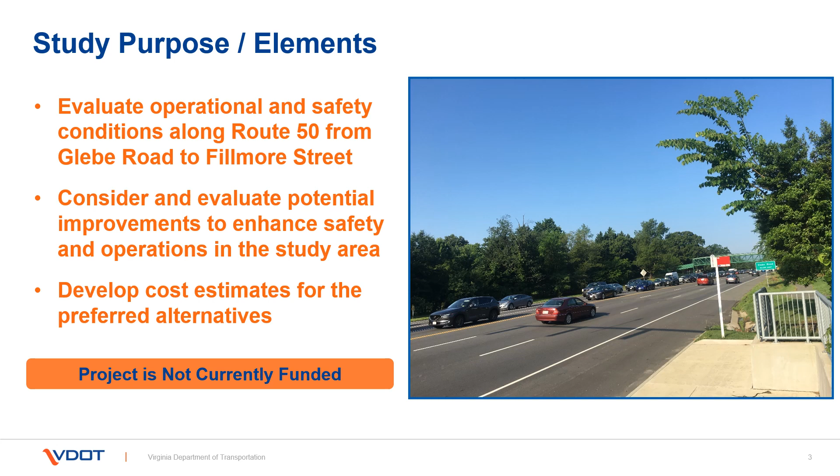The purpose of the study is to evaluate safety and operational conditions along Route 50 within the study area between Glebe Road and Fillmore Street, and to evaluate potential improvements to enhance safety and operations. Cost estimates will also be prepared for the alternatives under consideration to determine the amount of funding needed to implement the improvements. We want to emphasize that improvements identified as part of the study have not yet been funded, and there's no timeline for construction.

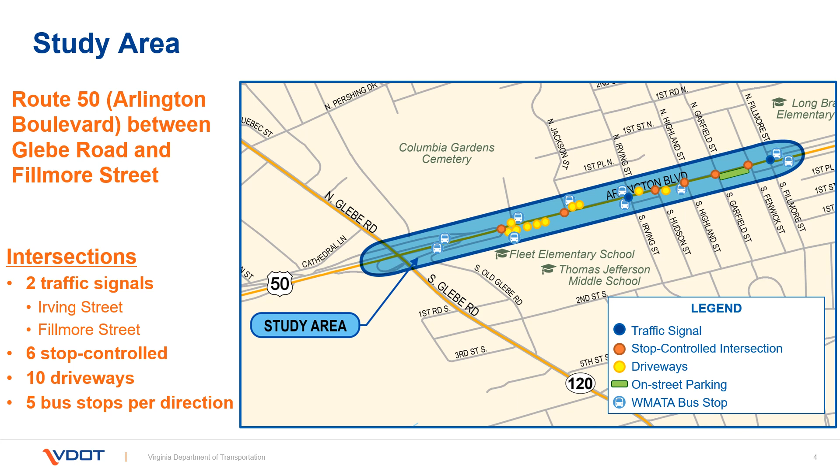The study area consists of Route 50 between Glebe Road and Fillmore Street. This section of Route 50 includes the two signalized intersections at Irving Street and Fillmore Street, which were recently improved with new traffic signal equipment and upgraded pedestrian and bicycle amenities. There are also 6 unsignalized intersections and 10 driveways.

The Route 50 study area is a little under a mile long, and about 62,000 vehicles travel through this area each day. Route 50 has a 45-mile-per-hour speed limit and has 6 travel lanes with 3 per direction, with no median and no turn lanes at most intersections. On-street parking is permitted along Route 50 between Garfield Street and Fenwick Street, and there are segments of frontage roads throughout the corridor to provide access to residential driveways and connect side streets.

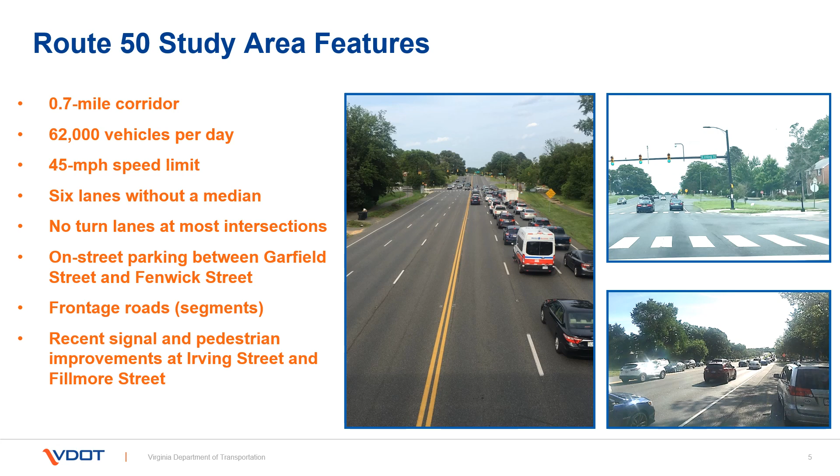The photo in the middle of the page depicts the 6 lanes without a median or left turn lanes approaching the Irving Street intersection. This illustrates the operational issues of not providing left turn lanes, especially at signalized intersections like Irving Street, and how through vehicles are avoiding this travel lane, reducing the efficiency of the third lane on Route 50. This also creates a major safety issue and increases the potential for rear-end and left turn related crashes.

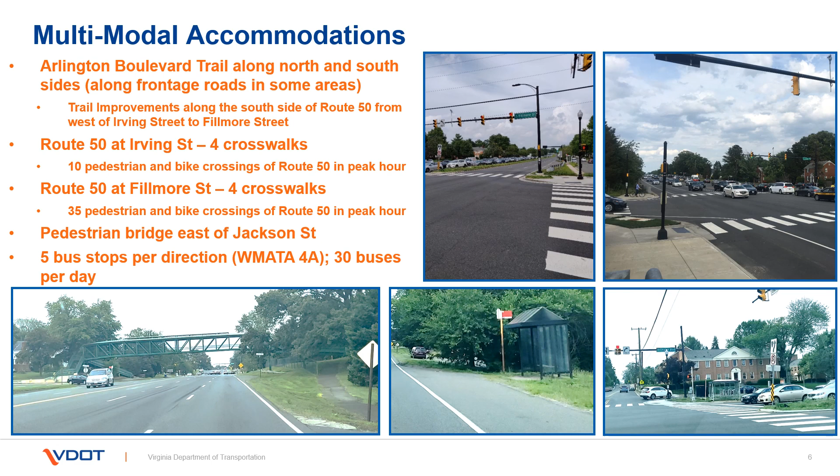The study area also contains several accommodations for pedestrians and bicycles. The Arlington Boulevard Trail runs along both sides of Route 50. The Irving Street and Fillmore Street signalized intersections each have signalized crosswalks on all 4 legs of the intersection, with the highest number of pedestrians crossing Route 50 on the east side of Fillmore Street. Pedestrians also have the option of crossing Route 50 on the pedestrian bridge located east of Jackson Street.

To assess safety conditions along the corridor, the study team reviewed crash data for a 5-year period. 247 crashes occurred within the study area, including 61 that resulted in injuries. 7 involved pedestrians or bicyclists, 5 of which occurred near Fillmore Street. Crashes were evaluated to identify appropriate improvement alternatives. Rear-end crashes were the most common type, followed by angle crashes, which can be attributed to a lack of access control at intersections. The crashes are more concentrated at intersections.

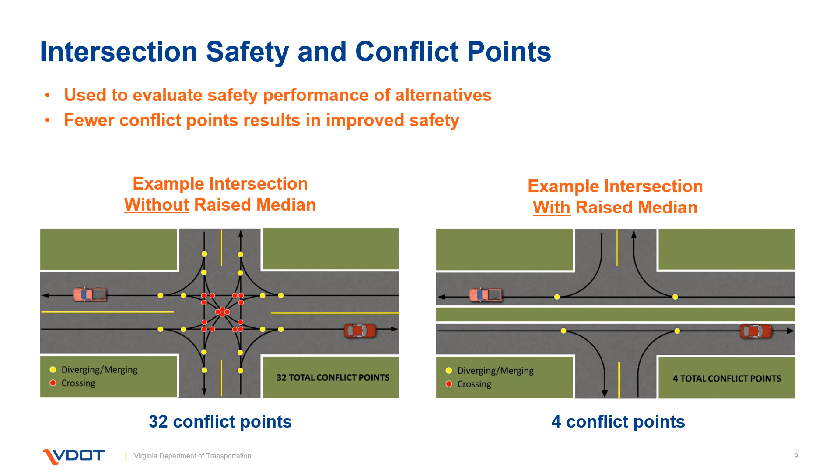During the data collection efforts, videos were recorded at the study intersections. This video was taken at Irving Street during the AM peak hour with the camera looking towards the southeast. Because vehicles turning left from Route 50 to Irving Street do not have a left turn lane or green arrow, they sit in the middle of the intersection waiting for a gap in traffic.

At the same time, vehicles who want to continue through on Route 50 become stuck behind the left turning vehicle and oftentimes switch lanes to go around. As you can see, the heavy eastbound Route 50 traffic during the AM peak hour causes long queues through the Irving Street intersection, making it even more difficult for vehicles wanting to make a westbound left turn onto Irving Street.

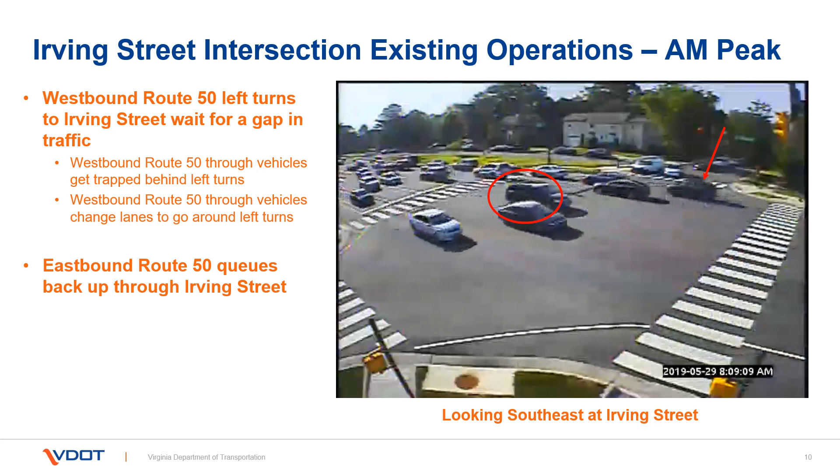This next video was taken at the Fillmore Street intersection during the AM peak hour. Traffic on Fillmore Street wanting to turn left onto Route 50 must yield to oncoming through traffic and pedestrians crossing Route 50. Vehicles that want to travel through the intersection to stay on Fillmore Street either stack behind the vehicle waiting to turn left or illegally use the right turn lane to go through the intersection.

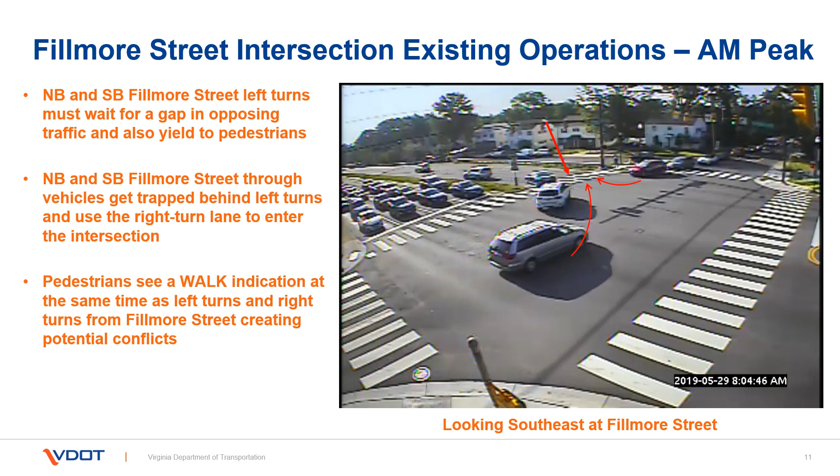In addition, pedestrians see a walk indication at the same time as left turns and right turns from Fillmore Street, which creates potential conflicts. This video was taken at the Fillmore Street intersection during the PM peak hour. Similar issues as the AM are still occurring, but this video specifically shows the motorist confusion at the intersection and varying levels of driver aggressiveness.

As this northbound Fillmore Street vehicle waits for an opportunity to turn left onto Route 50, the vehicles behind them stack up and then decide to make the same left turn without waiting. This causes potential conflicts as now there are two vehicles making the left turn at the same time from a single lane.

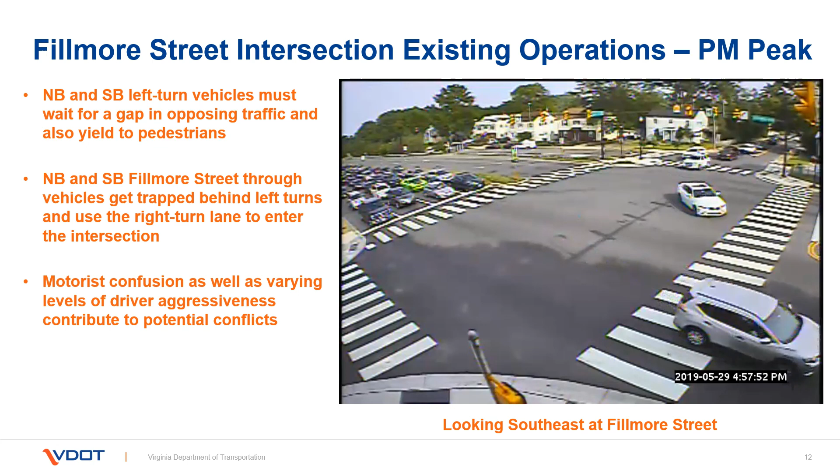Since the last public meeting in November, the study team reviewed the results of the online survey that participants used to submit feedback. Reviewing the public feedback helped our study team to gain an understanding of the public's primary concerns and the most needed improvements. Various alternatives were then developed and analyzed to compare the safety and operational benefits. Cost estimates were then developed for the various alternatives considered.

Here's an overview of the survey results. If you're interested in more details of the responses, please visit the VDOT project website for responses to each survey question. The survey was available for 20 days and had 927 total participants. The survey results showed that traffic congestion was ranked as the top priority, closely followed by highway safety and then pedestrian safety. We have summarized some of the other survey highlights.

The responses indicated that the top three mobility issues are lack of left turn lanes, difficulty making left turns, and difficulty when walking within the corridor or crossing Route 50. During the alternatives development process, left turn operations and pedestrian safety were a main focus of the study team. The top three safety concerns were congestion, difficulty turning onto side streets from Route 50, and aggressive or distracted driving.

5 total alternatives were developed and analyzed. There are 3 variations of Alternative 1, which are named Alternative 1A, 1B, and 1C. And in addition to the 5 alternatives, 4 options were developed which can be implemented in combination with any of the alternatives. I will explain the details of each alternative and option in more detail in the following pages.

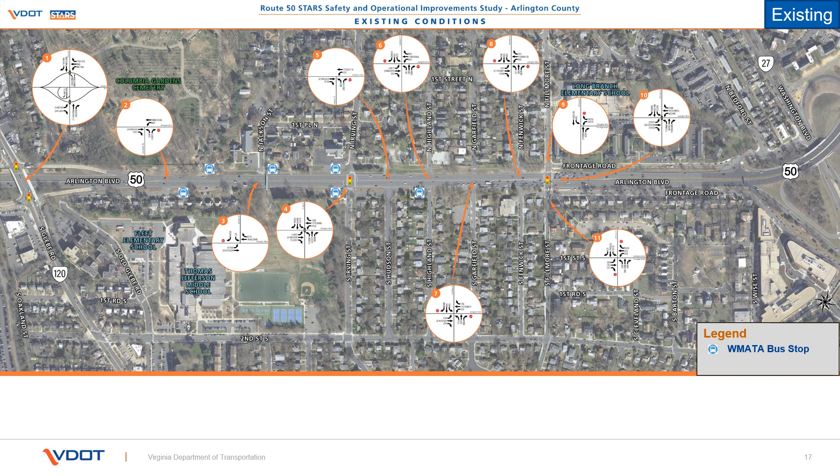This graphic depicts the current Route 50 corridor and serves as a baseline for comparison to the alternatives under consideration, with Glebe Road on the left-hand side of the page and Washington Boulevard on the right-hand side for a point of reference. We realize it may be difficult to see some of the details of these images, so for this graphic or any of the alternative graphics, higher resolution versions are available on the VDOT project website that you can zoom into and see more detail.

To begin our presentation of the alternatives, this graphic is a cross-section of Route 50 for alternatives 1A, 1B, and 1C. It consists of a grass median with 3 travel lanes in each direction. The median would narrow at locations with turn lanes, including Fillmore and Irving Street. The existing trails on each side would remain or be reconstructed if they are impacted by the widening. The raised median would improve safety by reducing conflict points at unsignalized intersections and by providing separation between the eastbound and westbound Route 50 travel lanes.

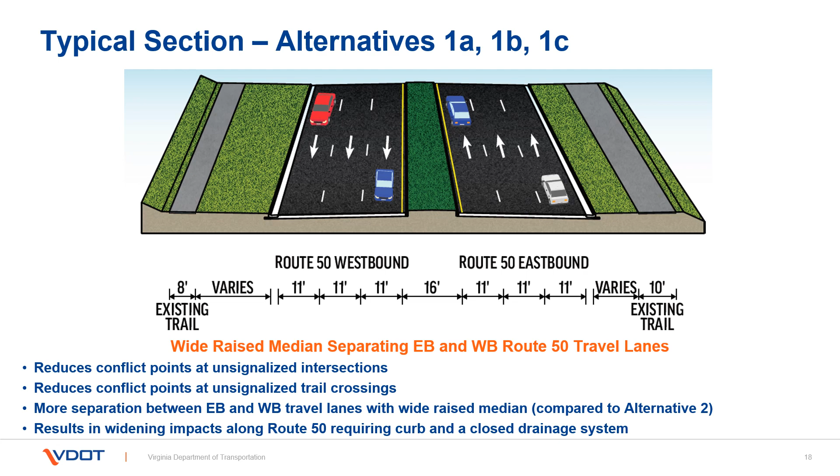Alternative 1A includes a raised median to prohibit left turns to and from the unsignalized intersections. Openings in the median would be provided at Fillmore Street and Irving Street. New left turn lanes would be installed on Route 50 at Irving Street with a protected green arrow, which would reduce the potential for rear-end crashes and help to balance traffic in each of the 3 through lanes along Route 50.

Bicycle and pedestrian safety at Irving Street would be improved due to the signalization of the Route 50 left turns. As a result of the raised median, the left turn volumes onto Irving Street and Fillmore Street are expected to increase. Another aspect of this alternative is extending the left turn lane on westbound Route 50 to Fillmore Street, which currently fills up and causes vehicles to back into the through lanes on Route 50. This feature is the same with all of the alternatives under consideration.

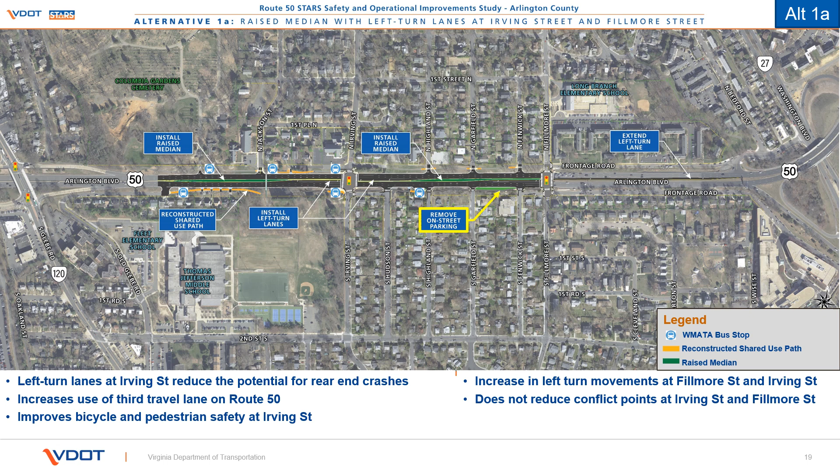The on-street parking on eastbound Route 50 between Garfield Street and Fenwick Street would also be removed with this alternative, as well as all 5 alternatives. Alternative 1B has the same general characteristics as 1A, but has some movement restrictions. The through movements from Irving Street to cross Route 50 are prohibited, and the left turn movements from Fillmore Street to Route 50 are also prohibited.

By eliminating the left turn movements from Fillmore Street, pedestrian and bicycle conflicts would be reduced, which is the location with the highest number of pedestrians crossing Route 50. Delays at Irving Street and Fillmore Street would also be reduced. It should be noted that the turn prohibitions may be difficult to enforce at the Fillmore Street and Irving Street intersections.

The next series of graphics depicts the potential alternate routes that motorists may take as a result of the turn restrictions. For each turn restriction, there are several other routes that motorists may take depending on their starting point or ultimate destinations, and this is just an example of the potential rerouting within the study area. Vehicles that want to travel northbound on Irving Street across Route 50 may instead make a northbound right onto Route 50 and then turn left onto Fillmore Street, or travel north on Fillmore Street to cross Route 50.

Vehicles that want to travel southbound on Irving Street across Route 50 may instead make a southbound left turn onto Route 50, then turn right onto Fillmore Street, or make a southbound right from Fillmore Street and left onto Irving Street, or just travel south on Fillmore Street to cross Route 50. Vehicles that want to make a northbound left from Fillmore Street may instead make a northbound left from Irving Street. Vehicles that want to make a southbound left from Fillmore Street may instead make a southbound left from Irving Street.

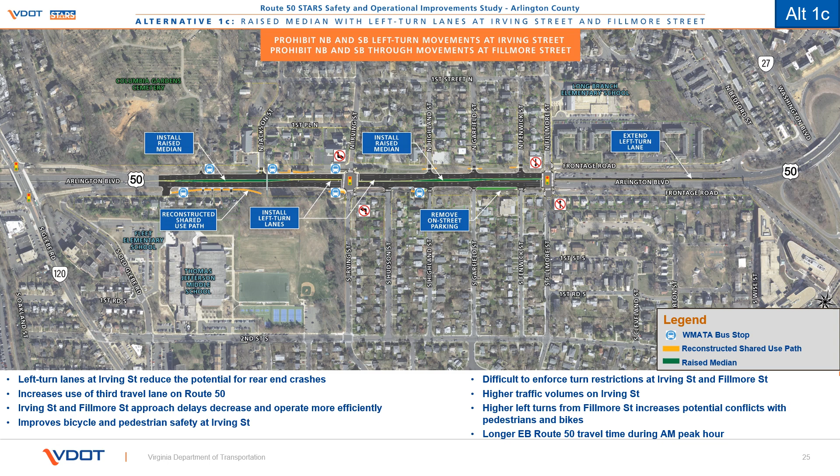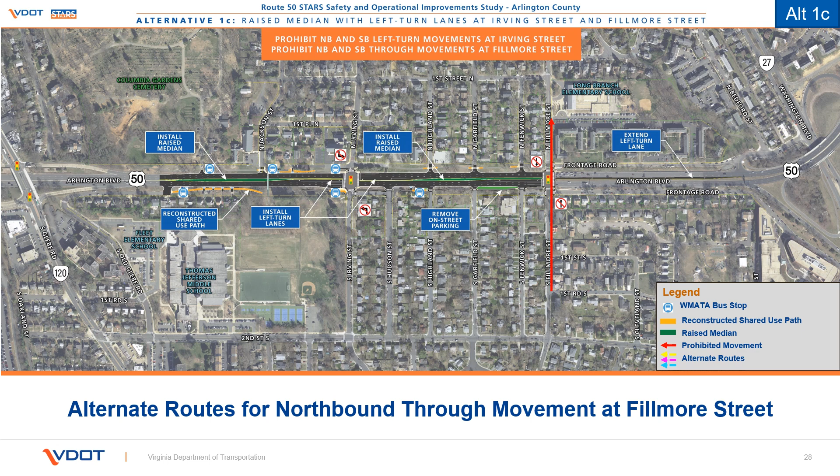Vehicles that want to make a northbound left turn from Irving Street onto Route 50 may instead make a northbound left at Fillmore Street. Vehicles that want to make a southbound left turn from Irving Street onto Route 50 may instead make a southbound left at Fillmore Street. Vehicles that want to travel northbound on Fillmore Street across Route 50 may instead make a northbound left onto Route 50 and then turn right onto Irving Street, or make a northbound right from Irving Street onto Route 50 and then turn left onto Fillmore Street, or just travel north on Irving Street to cross Route 50.

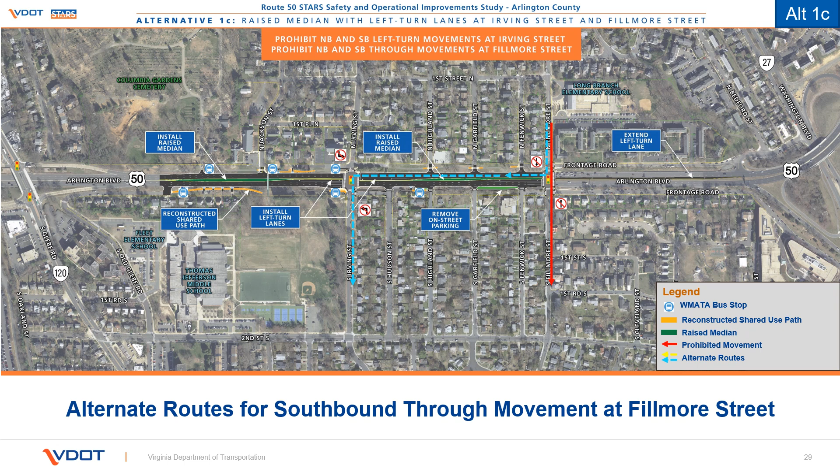Motorists that want to travel southbound on Fillmore Street across Route 50 may instead make a southbound right onto Route 50 and then turn left onto Irving Street, or just travel south on Irving Street across Route 50. Moving on to our discussion of Alternative 2. Similar to Alternative 1 designs, the cross-section for Alternative 2 would include a raised median, but it would be 6 feet wide in concrete. The narrower median would result in less significant widening of Route 50, but also means less separation between the eastbound and westbound travel lanes.

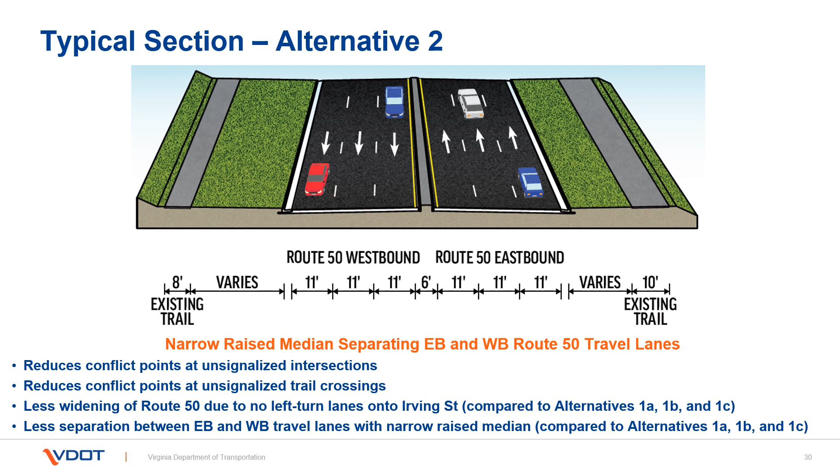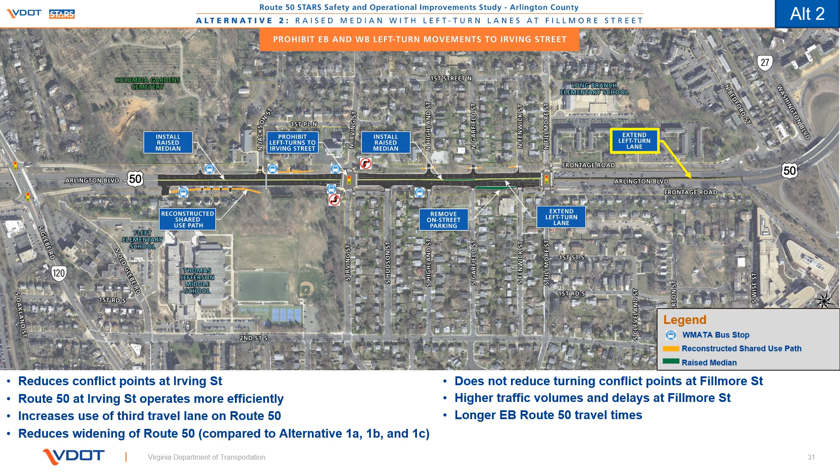Alternative 2 includes a raised median to prohibit left turns to and from side streets. Left turns from Route 50 to Irving Street would be prohibited with signs, and left turn lanes would not be provided, which would divert traffic to Fillmore Street. Similar to Alternatives 1A, 1B, and 1C, the westbound left turn lane storage at Fillmore Street would be extended. Vehicles that want to make an eastbound left turn from Route 50 to Irving Street may instead turn left at Fillmore Street.

Vehicles that want to make a westbound left turn from Route 50 to Irving Street may instead make a left turn at Fillmore Street.

And now to describe Alternative 3. The cross-section of Alternative 3 is the same as existing conditions. There would be no median or physical separation between the two directions of Route 50. Left turns at unsignalized intersections would be prohibited with signing, and right-in, right-out islands. Similar to Alternative 2, left turns onto Irving Street would be prohibited and no left turn lanes would be provided.

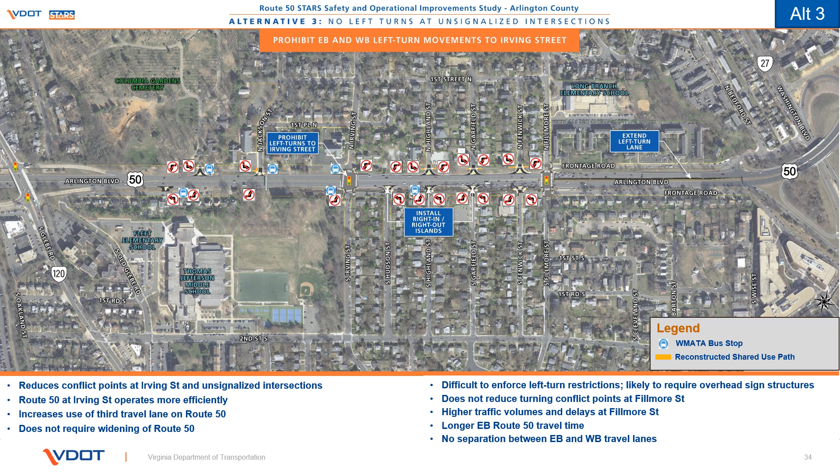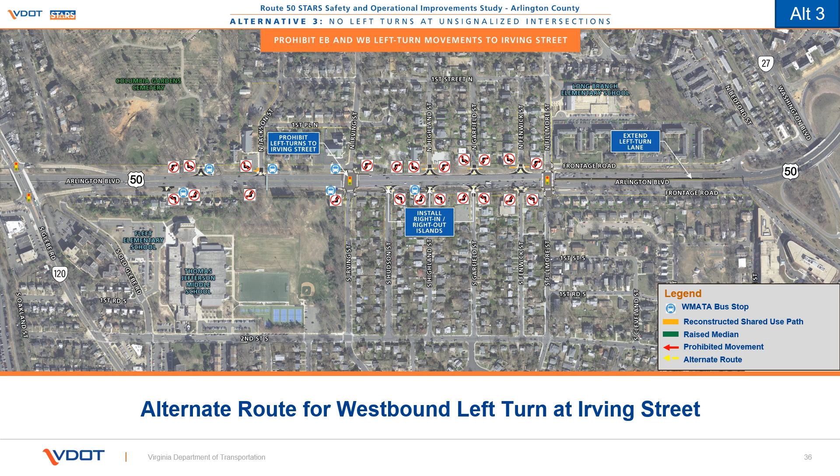This alternative requires no widening of Route 50, but enforcement of the left turn restrictions would be difficult and would likely require overhead sign structures to install the no left turn signs along Route 50. Similar to Alternative 2, vehicles wanting to turn left onto Irving Street from the west may turn left onto Fillmore Street. Or vehicles wanting to turn left onto Irving Street from the east may turn left onto Fillmore Street.

Because safety is one of the primary issues in the study area, it's important to evaluate improvements to safety for each of the alternatives. Of the 57 angle or left turn crashes, approximately 16 would have been eliminated with a raised median. Approximately 26 of the 133 rear-end crashes specifically attributed to mid-block left turns would also have been eliminated. The alternatives would reduce conflict points in the study area from 56 to 69%.

In the November survey, the public identified difficulty making left turns and lack of left turn lanes as one of their two primary concerns. All 5 alternatives would improve corridor operations by prohibiting left turns from unsignalized intersections. Alternatives 1B and 1C include the most improvements to left turn operations by prohibiting certain side street movements at Irving Street and Fillmore Street in order for the side streets to operate more efficiently. These 2 alternatives also install left turn lanes at Irving Street with a protected green arrow.

The survey also identified safety of pedestrian crossings of Route 50 as a primary concern. Alternatives 1B and 1C improve safety for pedestrians crossing Route 50 to the greatest extent by prohibiting certain side street movements from Irving Street and Fillmore Street. Alternative 1B reduces the greatest number of conflicts with pedestrians due to the higher volume of pedestrians crossing Route 50 at Fillmore Street and prohibiting the left turns from Fillmore Street onto Route 50.

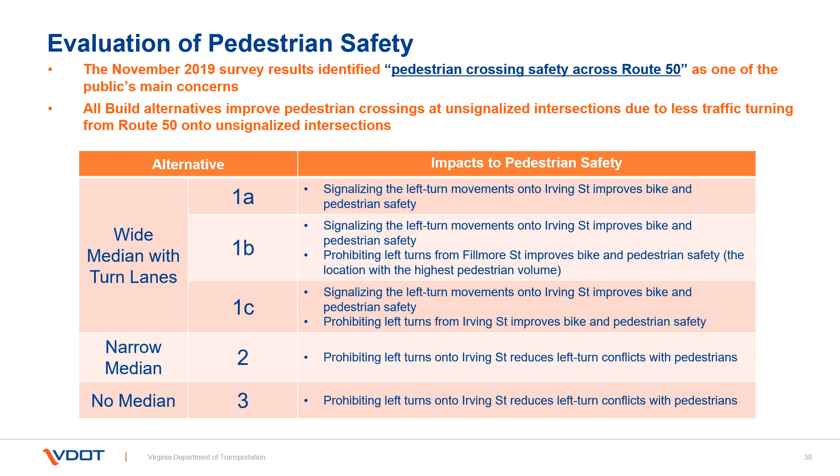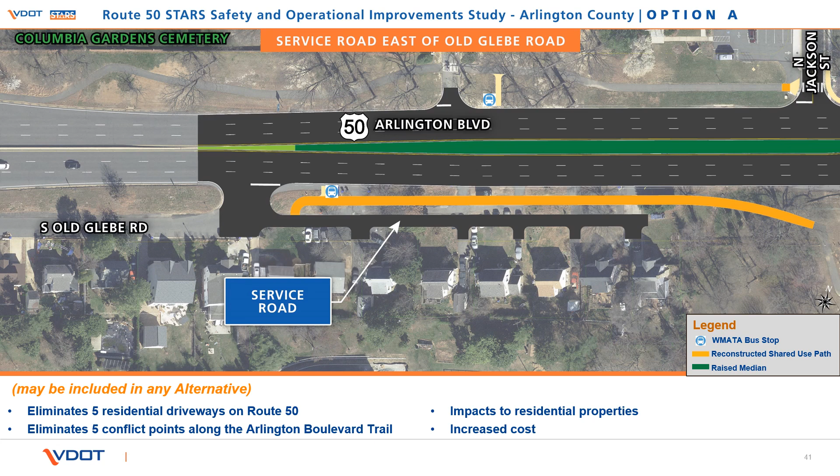This is the first of 4 options that can be combined with any of the chosen alternatives discussed on the prior pages. Option A is a service road that would be an extension of Old Glebe Road and eliminates 5 residential driveways on Route 50, thereby reducing conflict points and improving safety. Option B is a service road north of Route 50 and west of Irving Street that would eliminate 2 driveways on Route 50, reducing conflict points and improving safety.

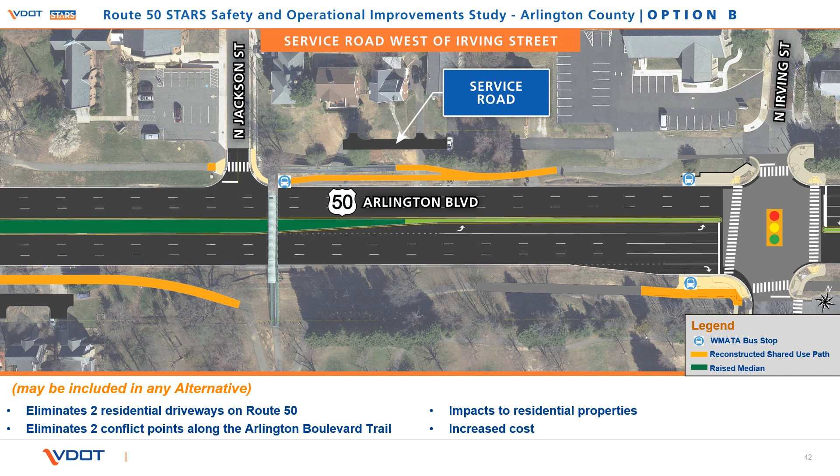Option C would maintain on-street parking between Garfield Street and Fenwick Street, where parking is currently allowed. This option would not eliminate potential conflicts along Route 50 when vehicles enter and exit parking spaces, which is not typical for a corridor like Route 50. Option D would extend the service road between Garfield Street and Fenwick Street. This option would eliminate on-street parking conflicts on Route 50 while still providing opportunities for parking.

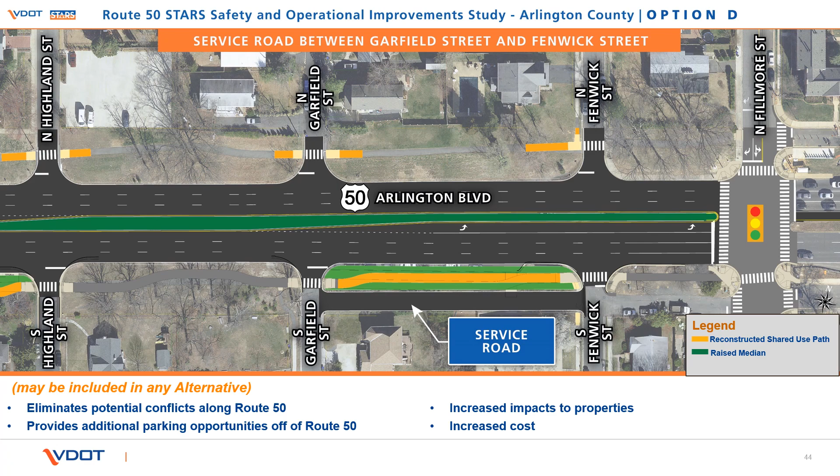We are now asking for your feedback on the alternatives under consideration using the survey available on the VDOT project website. The comment period will extend through May 29th. Once your feedback is collected, VDOT and Arlington County will review the survey results and then identify a preferred alternative. Arlington County will then apply for project funding as the project is not yet funded. Arlington County has submitted a pre-application to apply for Smart Scale funding, with the final application due in August 2020.